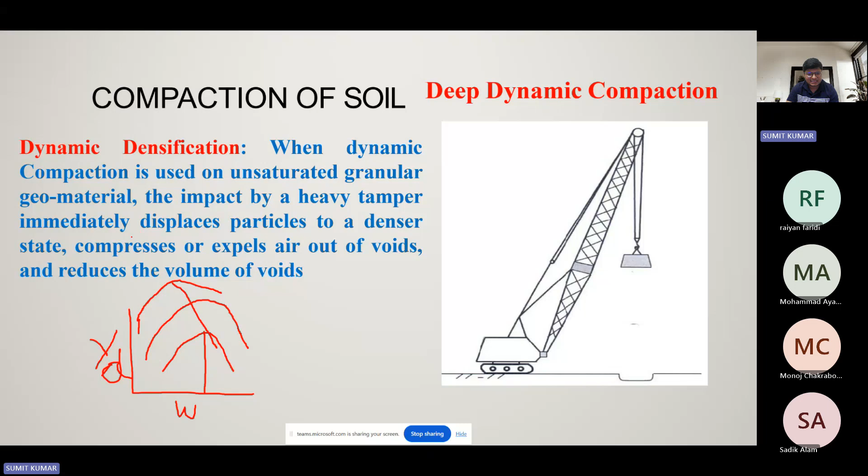So that takes large time to small time depending upon the type of soil. Suppose if we have sandy soil, the compaction takes place during the construction process only, but if clay soil is there, the overall compaction may take 100 years, 200 years. So that needs to be understood. Hence we want to densify the soil as much as possible before any construction of the superstructure. That is also valid for building construction as well, right? Okay, so I will go quickly with this and then move to the problem.

So some points here: deep dynamic compaction is generally not recommended for clay soil with high plasticity index and high degree of saturation. Drainage and dewatering are required to reduce the excess water pressure in the clay soil generated by deep dynamic compaction. A high water table reduces the effectiveness of dynamic compaction. If the water table is high and dynamic compaction is performed, the effectiveness gets reduced.

Regarding the application of dynamic compaction - it is used to improve problematic geomaterial by increasing the bearing capacity, reducing settlement, minimizing the collapsible potential, and mitigating the liquefaction potential for commercial and residential buildings, storage tanks, highways, railways, airports, and harbors.

Now talking about the advantages - what are the benefits which we achieve through compaction of soil? It improves a large area of geomaterial in a relatively shorter time at low cost, and is effective for loose and partially saturated fill with less than 15% fines. It can detect weak or loose areas during the operation and can change heterogeneous material to more uniform material.

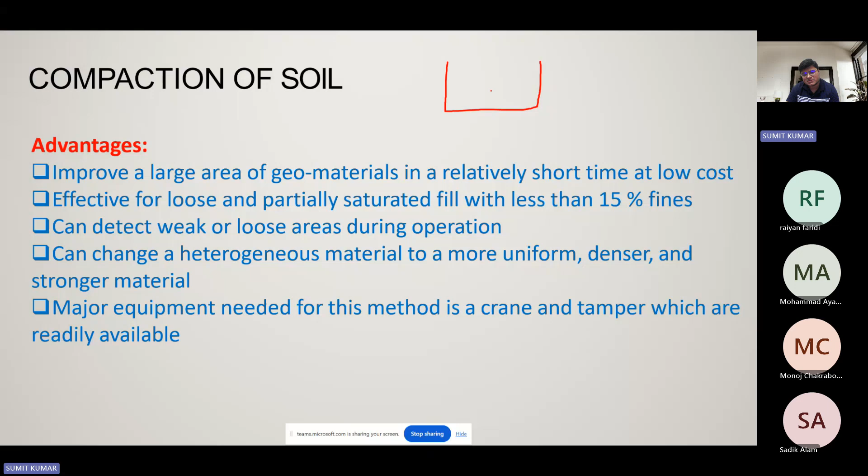So the major equipment needed for this method is a crane and a tamper, which are readily available, as also shown in the previous slide figure.

Now moving to the disadvantages of compaction of soil. Generally it is less to not effective to improve saturated clay soil. It has already been said that if the water table is there, it is a problem. So in saturated conditions, the water table is present up to the ground level if it is fully saturated.

Let me explain one thing - I think that thing is not discussed yet, so let me explain before moving ahead. Okay, let me read this disadvantages, then I want to discuss some important points which are very much important for this class. Let me read the disadvantages, then I'll discuss some points.

So, drainage and dewatering and a long waiting period is required to use saturated clay soils, and it induces noise, vibration, and lateral movement, which may cause problems to nearby buildings, substructures, and utility lines, maybe like pipelines that move from over there. The mobilization cost may be higher when large cranes and tampers are used, and instrumentation is required to monitor the various aspects.

Okay, so I want to discuss something. What is this? Let me add a blank slide.

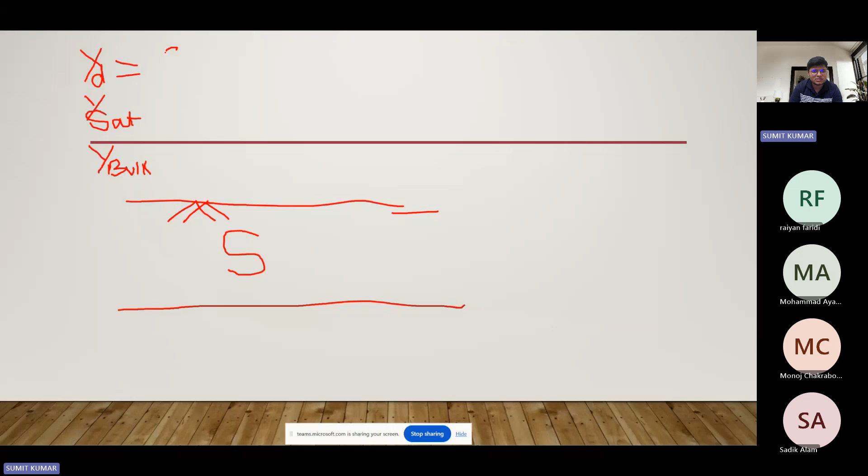Gamma dry is G into gamma W, divided by 1 plus E, where G is the specific gravity of soil, gamma W is the density of water, and E is the void ratio. Void ratio is the volume of void by volume of solid.

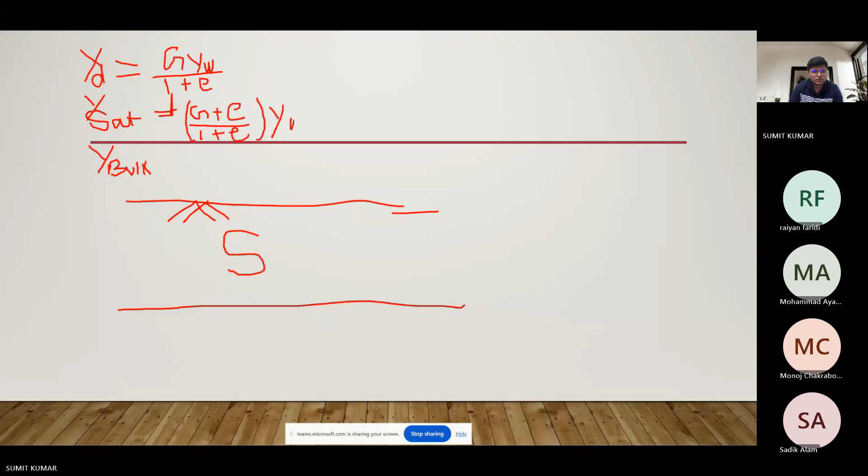Similarly, gamma saturated, that is equal to, I think that is understandable, G plus E upon 1 plus E, into gamma W. Where gamma bulk is G plus SE by 1 plus E, into gamma W.

Over here, G is the specific gravity, E is the void ratio, S is the degree of saturation, and gamma W is the density of water, wet density of water basically.

So over here, what I am saying is that this is the soil, and we may consider that water table is present at this level, and we could assume that above the water table, the soil is dry. Maybe bulk density could also be there if due to some

seepage, negative pore water pressure develops, or maybe some other condition. If the soil gets saturated over here, the gamma saturated could be there, but if it is not mentioned anywhere in the problem, it is gamma dry.

And over here the gamma saturated is there. Now some more important points which you need to understand before moving ahead: if gamma saturated is known and gamma dry is known, now understand what is the total stress, what is the pore water pressure, and what is the effective stress.

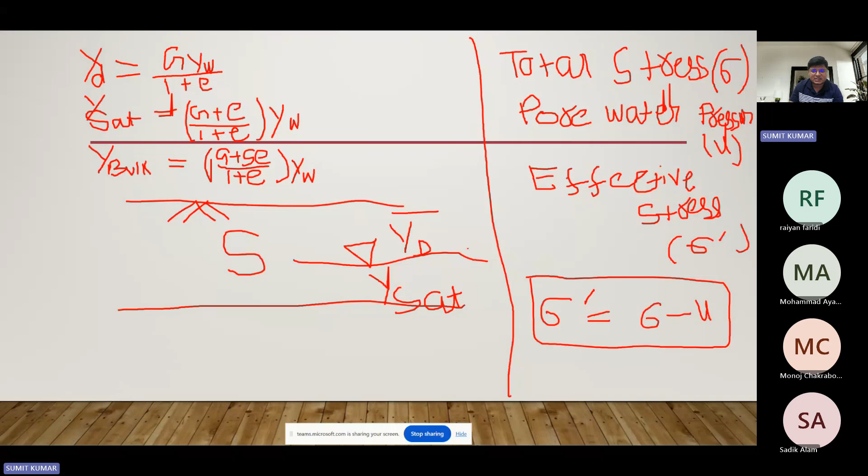Now let me take another slide to explain some more points about total stress, pore water pressure, and effective stress. So what is this? Let me take a new slide. Okay, now see, suppose I give a simple example, again with the same figure.

Suppose this is a soil, and suppose at this point this is a distance of 2 meters, and this is also 2 meters, and we want to get the total stress and effective stress at this point A.

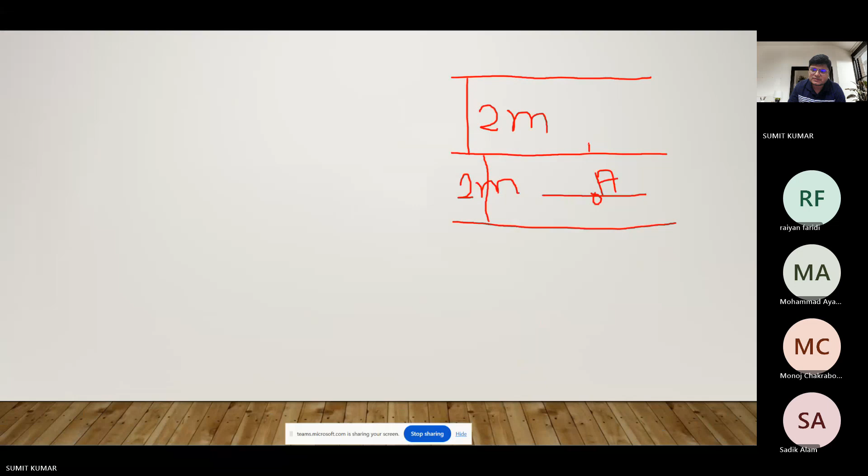At this point we want to get the total stress, effective stress, and pore water pressure, and suppose the water table is somewhat over here, and this is a ground surface. Ground surface is represented like this.

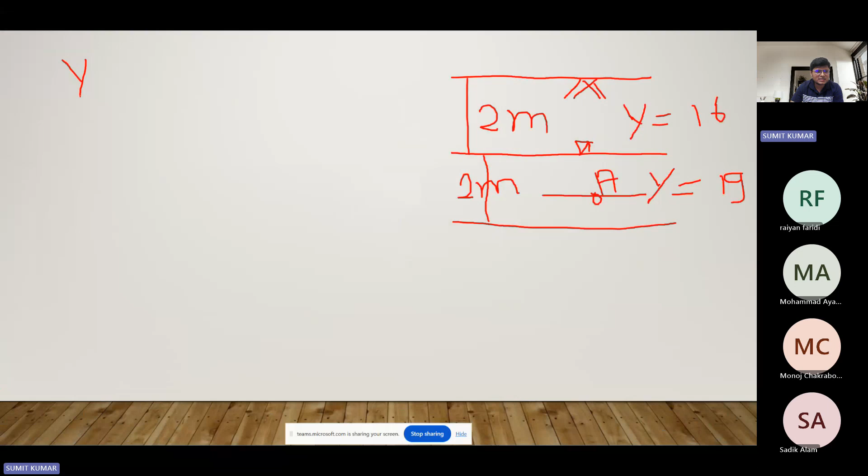Water table is represented by an inverted triangle, so water table is there, and the unit weight gamma for this, suppose 16 kilonewton per meter cube, and gamma for this may be 19 kilonewton per meter cube. In this case, assume gamma W, which is actually 9.81, as 10, just for understanding.

Now, so if we have to calculate the total stress, pore water pressure, and effective stress at A, we write total stress as sigma, as I already showed. So total stress becomes 16 kilonewton per meter cube multiplied by 2, plus 19 into 1. Basically, this point A is at the center of the second layer, 1 meter.

So this becomes 16 into 2, which is 32, plus 19, which gives 51.

51 kilonewton per meter square. This is the value of total stress, because total stress, pore water pressure, and effective stress came many times in this class. So I take a very small, simple example to explain it. Then we move ahead and see some more thing.

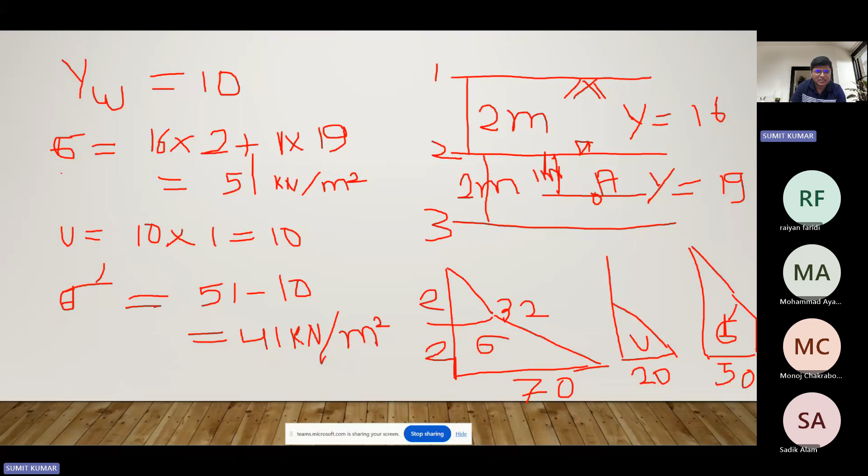give me a minute. Okay, okay, let me move ahead. Okay.

Okay, so now we will talk about design considerations. Before the design of the deep compaction, a geotechnical investigation is required to evaluate the site condition, which includes the geotechnical profiles. Different properties at the site also need to be understood, like the particle size, how much fine content is there, what is the degree of saturation, what are the Atterberg limits, because that becomes very much important before we go ahead.

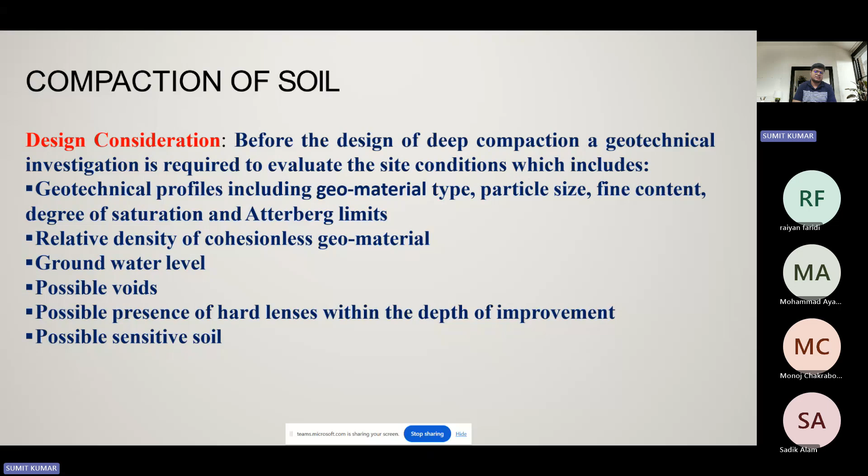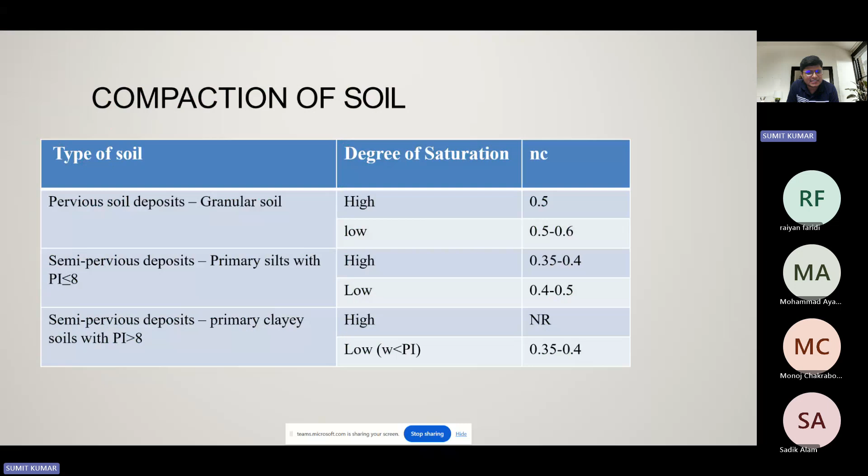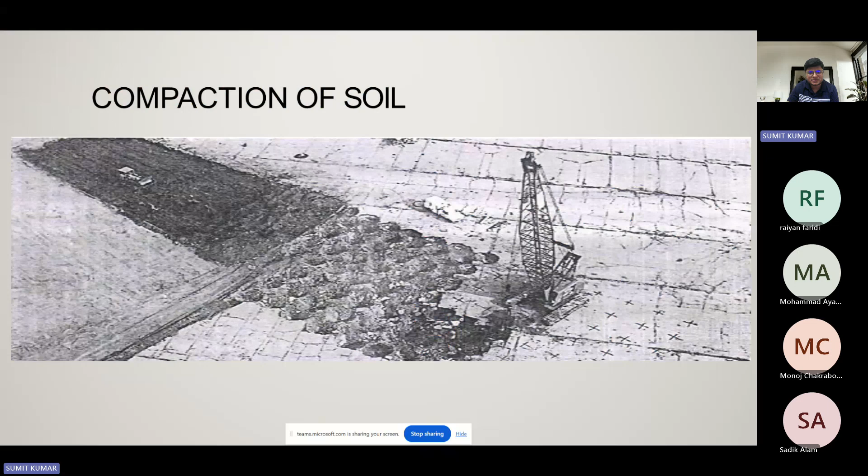Now we directly move to the numerical problems for saving time. Now we come across the problems which I want to discuss in this class only, because these problems have very much importance in developing the understanding of the subject. The theoretical concept you must go across in the lecture of the sir - over there they have discussed in very detail, but the numerical problems may be missed out, so it is better to cover the numerical problems.

So over here you see the question related to critical hydraulic gradient. I think the critical hydraulic gradient is something which we also calculated in the previous class. Over there, if you remember, we have calculated IC as critical hydraulic gradient as G minus...

Okay, we have calculated IC as G minus 1 upon 1 plus E as the critical hydraulic gradient, and IC by I equals factor of safety. So those things we have discussed.

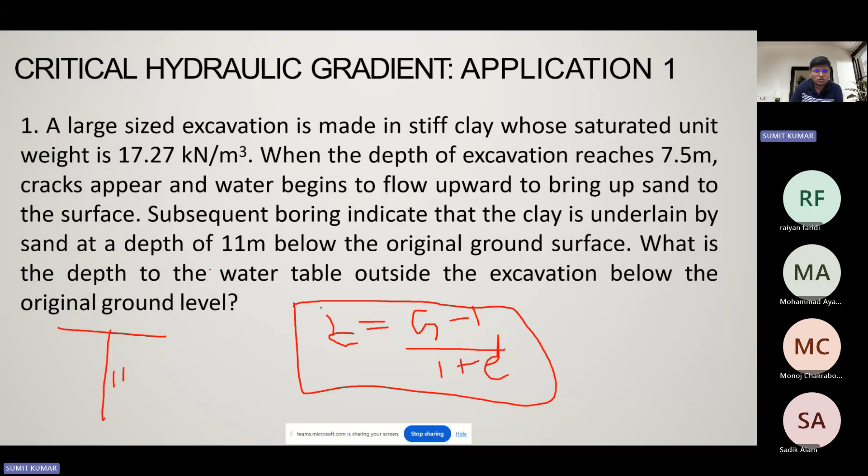So what is the depth of the water table outside the excavation below the original ground level? I have already solved this problem, so let's move to the solution.

First, since sand boils, the effective vertical stress at the clay-sand interface becomes 0, and the clay thickness below the excavation is 11 minus 7.5, because at 7.5 meters excavation the crack developed. So the upward head difference here is 7.5 minus dw, where dw is the outside water table depth below the ground.

The condition for boiling is that effective stress should be 0, and effective stress sigma v dash equals gamma sat times h minus pore water pressure, that is gamma w times delta h. So we calculated delta h as gamma sat upon gamma w into h, and with gamma sat given as 17.27 and gamma w as 9.81, delta h is found to be 6.16 meters.

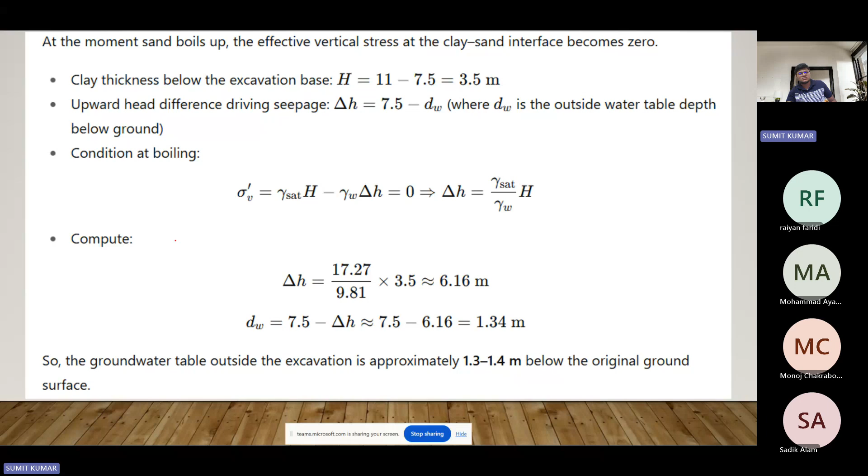Hence we are interested in calculating dw, the outside water table depth. So dw is 7.5 minus delta h, which is found to be about 1.3 meters. So the water table outside the excavation is approximately 1.3 to 1.4 meters below the original ground surface. I think this is a very simple thing.

Now let's move to the next problem, which I will solve. Over here also I have made the solution, but I will solve it with pen and paper for better understanding if required. Let me read the problem, since the previous one was a repetition of what we discussed in the last class, if you recall.

The question says: if an excavation is carried out in a soil with porosity 0.4 and specific gravity 2.65, determine the critical gradient. So first solve this part of the problem: excavation is carried out with porosity n equal to 0.4 and G equal to 2.65.

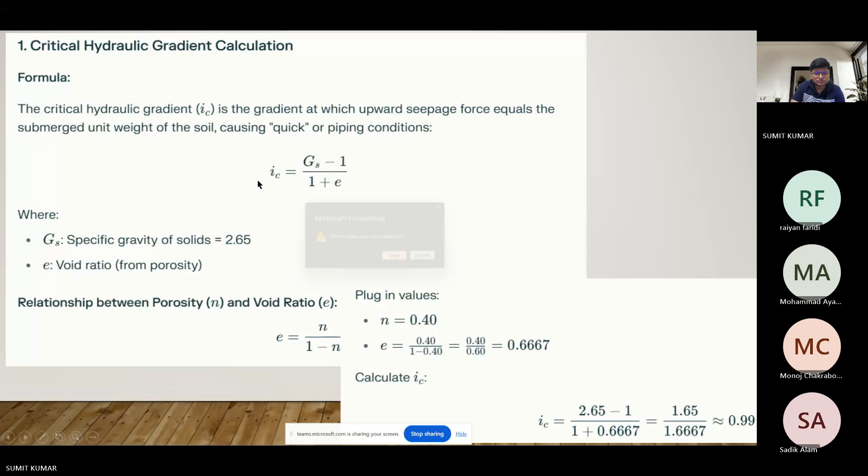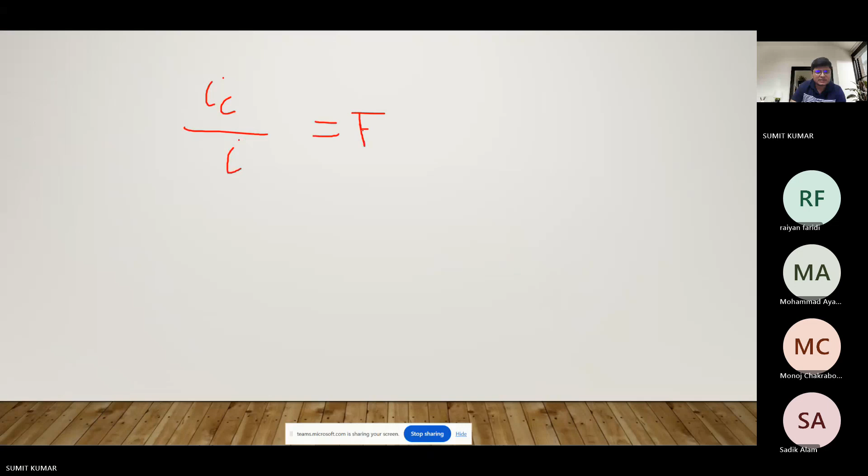We have IC upon I equal to factor of safety. This factor of safety is 2.5. So I is equal to 0.99 upon 2.5... the 1.5 meter layer of soil is subjected to upward seepage head of 1.95 meter. What is the depth of coarse sand? So this I equal delta H by L, upward seepage head of 1.95.

So this is equal to delta H upon L, and this delta H is 1.95 by L. L is nothing but 1.5 plus the required height, H. So by solving this, you could calculate H, which is the required height. Let me calculate... this comes out as 2.59995 upon... okay, maybe I made some calculation mistake. Let me see, this value becomes 3.42 meter.

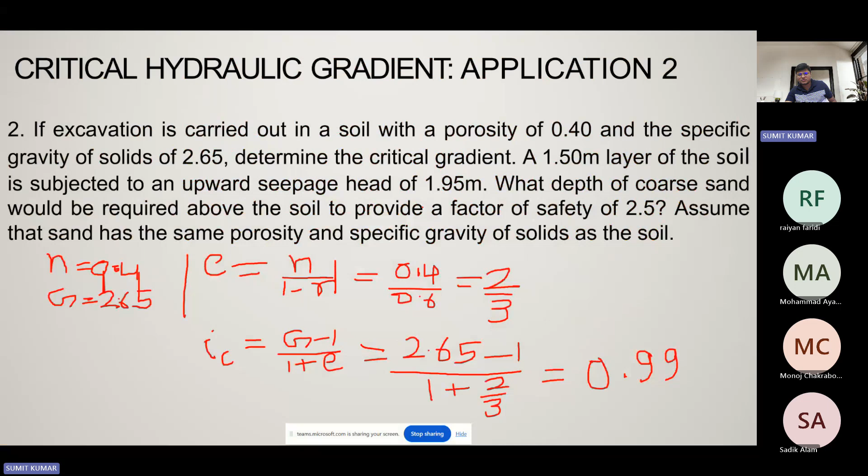I equal to seepage head 1.95 by 1.5. Okay, I considered something different. 1.95 upon 1.5, the actual hydraulic gradient is 1.95 upon 1.5. So I is 1.3, but the required factor of safety is 2.5. I did this as 0.3999 upon this, and this is what I did, but I can't find the mistake. Delta H 1.95 by 2.5 into 0.65.

I made some calculation mistake, but following the same concept, the solution comes out to be 3.42 meters. I used factor of safety equal to IC by I required, so I required is found to be 0.99 upon 2.5. IC by I equal to I required equal to factor of safety, IC by factor of safety - I made the mistake there. IC by 2.5, so IC 0.29... I don't know how I wrote this. It's IC upon 2.5, which is 0.99 upon 2.5.

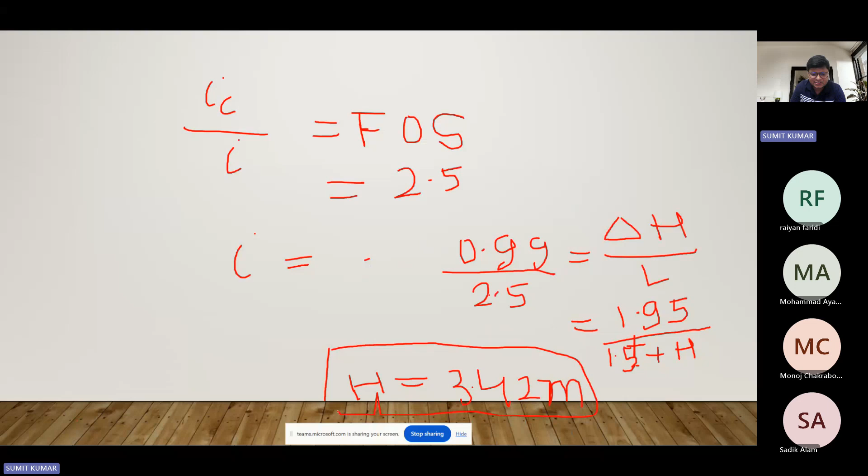Now let me calculate this again, because it gave me confusion. 2.5, 1.95 upon answer, minus 1.5, so it comes out to be 3.42 meters. So this is the answer - this much height of soil is required in order to achieve the factor of safety of 2.5. This is the solution, and the same thing they did, and they also found 3.42 meters, which we have found. So I think things are clear up to here.

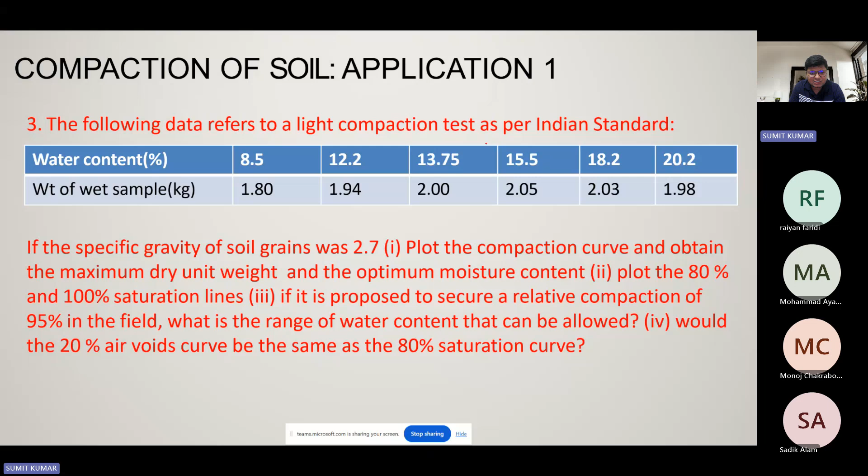Now this is also a problem based on the light compaction test, but this solution I have provided, I am not going to discuss it here. This will be shared with you, you cover it by yourself, because it's not that much conversion, so I don't want to waste time on this problem. We'll move to the next problem from here and solve it.

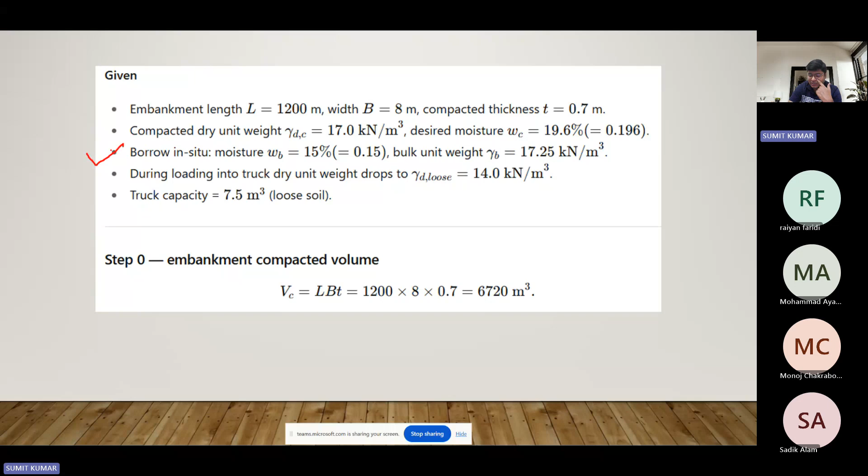We need to know the same mass of dry soil to be compacted in the embankment using the dry unit weight in kilonewton per meter cube and the dry weight required. Since VC is already calculated, gamma D into VC gives the in-situ borrow pit dry unit weight. First we calculate gamma D, which is 17.25 upon 1 plus W, where W is 15%, as seen from the third point. As seen from this point, we calculate the dry density as 15 kilonewton per meter cube.

We multiply it with this volume of 6720 to calculate the weight. Dividing by 15, we calculate the in-situ volume required, that is 7616 meter cube, which is asked in the first part of the problem: the volume of soil to be excavated from the borrow area.

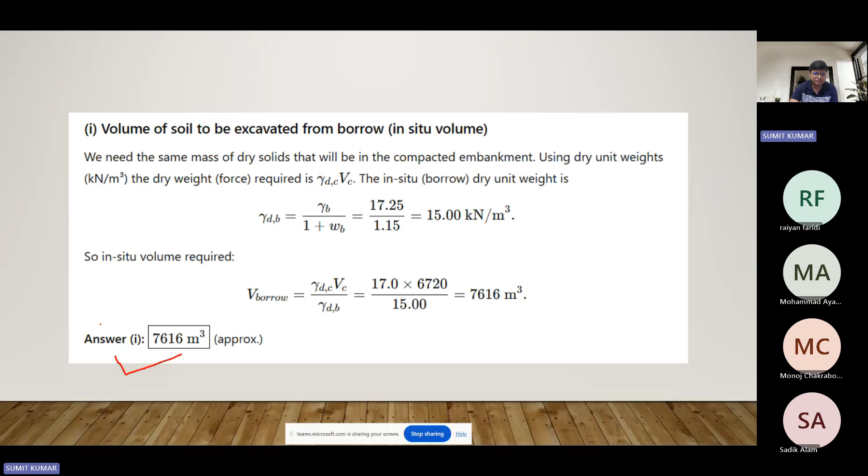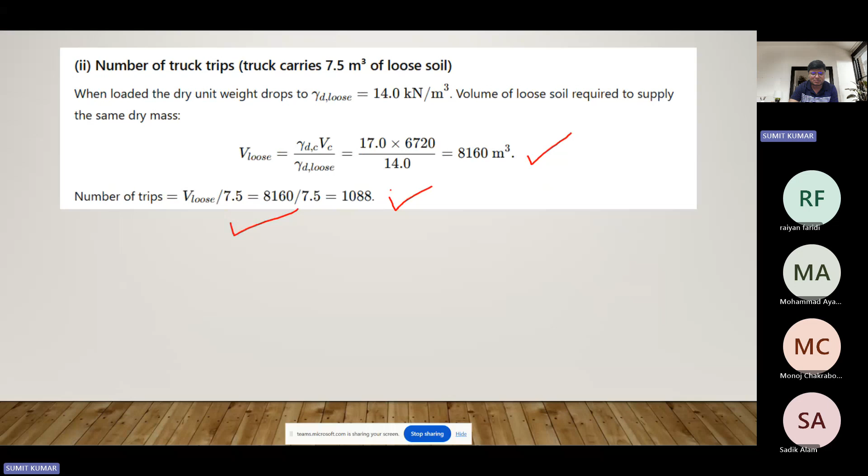This becomes 1088. Maybe there's some calculation mistake somewhere, so you can check it yourself, but more or less this is the correct answer. The next part of the problem asks about the volume of water to be added at the site.

The water mass present at 15% moisture content is a certain value, and the water content required is 0.196. So the extra water required is 2.2824 into 10 to the power 6 minus 1.7468 into 10 to the power 6, which becomes 5.36 into 10 to the power 5 kg. Converting to volume by dividing by 1000 kg per meter cube gives 535.7 meter cube. Hence 536 meter cube of water is required to achieve the moisture content of 19.6%, as requested in the problem.

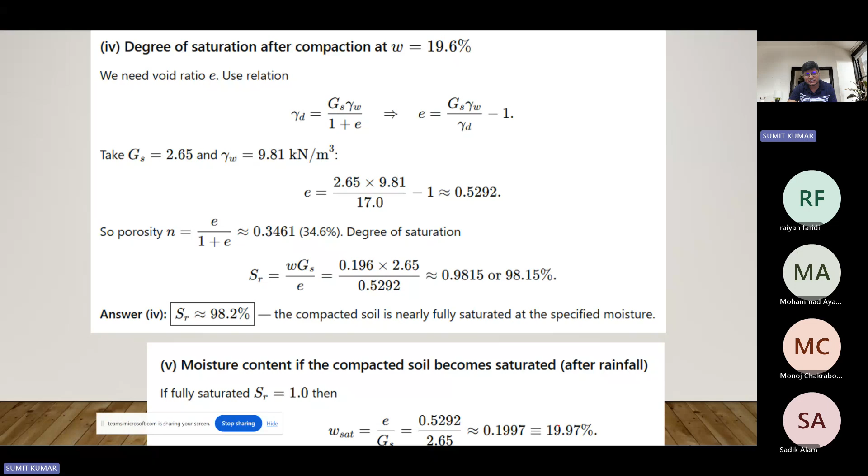Next, regarding moisture content: if the compacted soil becomes saturated after rainfall, the degree of saturation becomes 1. At that point, calculating the water content at saturated condition, it is found to be 19.97%. This problem is now solved, and I suggest you go through it yourself and verify whether the solution matches, because if there's some calculation mistake, there might be errors in the value, but the steps are more or less the same.

Now we move to the effective stress concept, which I already discussed in two of the slides earlier in this class. Here we are talking about effective stress in soil. The concept of effective stress was introduced in 1923 by Karl Terzaghi, also known as the father of soil mechanics. Earlier, stress was calculated only as total stress; there was no effective stress concept. So what is the need to calculate effective stress? Total stress is not sufficient to define or explain things, so there must be some need or requirement that led to the concept of effective stress.

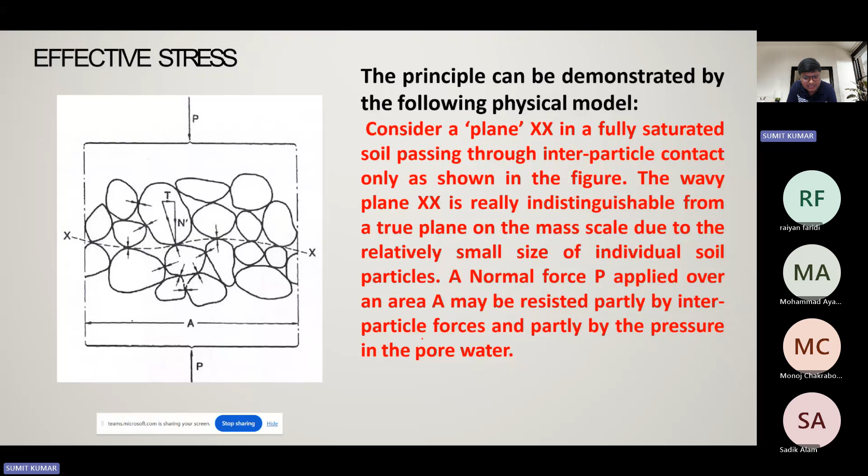A normal force P applied over an area A may be resisted partly by the interparticle force and partly by the pressure in the pore water. The interparticle forces are very random in both magnitude and direction throughout the soil mass.

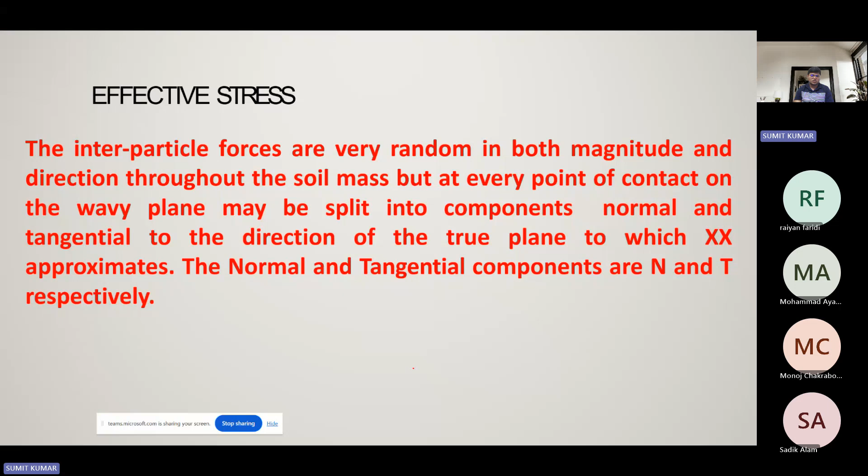But at every point of contact on the wavy plane, the force may be split into components normal and tangential to the direction of the true plane which the XX plane approximates, with the normal and tangential components being N and T respectively. The effective normal stress is interpreted as the sum of all normal components divided by area, a summation of N by area from that figure, and the total normal stress is given by sigma equal to P by A.

Subsequently, if point contact is assumed between the particles, the pore water pressure will act on the plane over the entire area A. Then for equilibrium in the direction normal to XX: P equals summation of N' plus u into A, or P by A equals summation of N' by A plus u, or sigma equals sigma' plus u, or sigma' equals sigma minus u, which means that the effective stress is equal to total stress minus pore water pressure.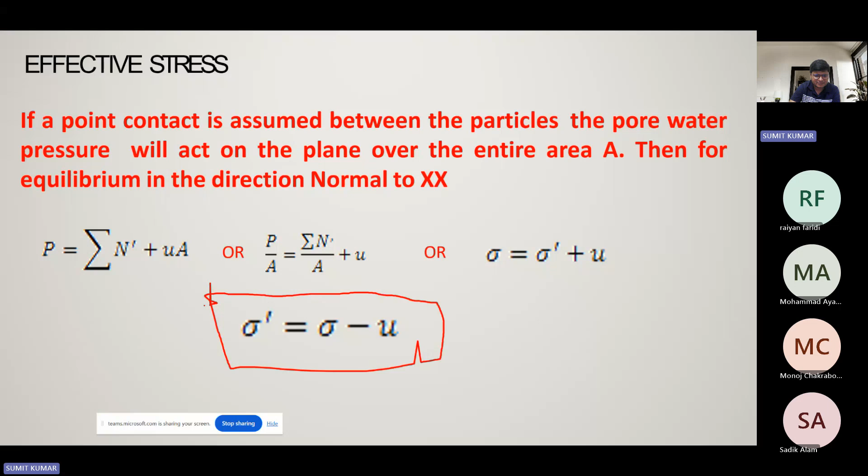Now let's talk about the critical points to note on the effective stress. Some of the most important points which need to be underscored, underlined, and highlighted while discussing total stress, pore water pressure, and effective stress concepts.

The pore water pressure, which acts equally in every direction, will act on the entire surface of any particle, but is assumed not to change the volume of particles. Also, the pore water pressure does not cause particles to press together.

The error involved in assuming point contact between the particles is negligible in the soil, since the total contact area is normally between 1 and 3% of the cross-sectional area A. The effective stress is a concept that is the summation of normal load through the contact points divided by the total area. Hence it does not represent the true contact stress between the two particles. The actual contact stress N/a is much higher than that of the defined effective stress.

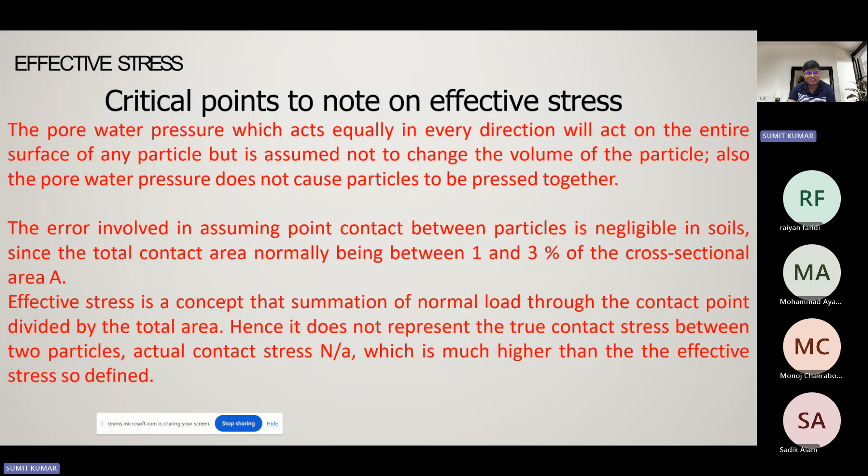Now, talking about the effective vertical stress due to self-weight, it becomes gamma sat into Z, considering a soil mass having a horizontal surface with the water table at the surface level. The total vertical stress, that is the total normal stress on the horizontal plane at depth Z, is equal to the weight of all material, that is solid plus water only, because the void filled with air has no weight.

Similarly, the pore water pressure becomes the weight density of water multiplied by the depth at which it is present, and the pore water pressure at any depth will be hydrostatic, since the void space between the solid particles is continuous, so the depth changes accordingly.

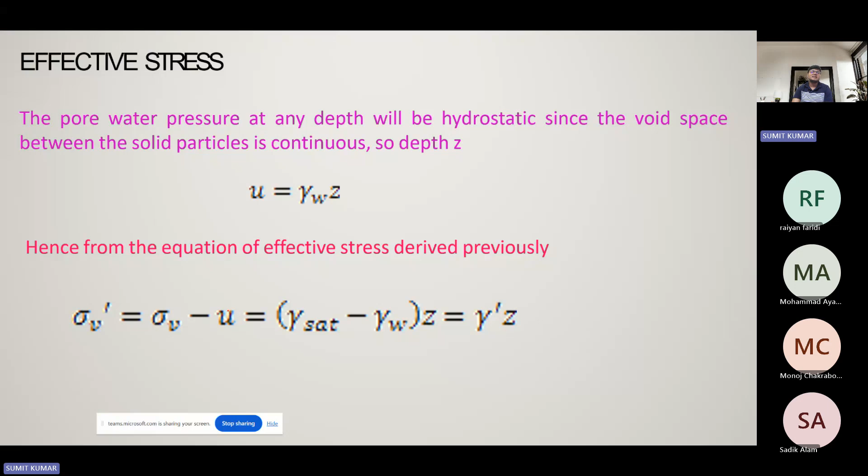Hence, from the equation of effective stress derived previously, sigma v' becomes sigma v minus u, which becomes gamma sat minus gamma w into z, that is gamma' into z, which is the effective stress if the water table is present up to the ground surface. If that is not the case, things may look different.

Now we have the next problem, which is a very good problem. Let me take another slide in which I am going to solve it.

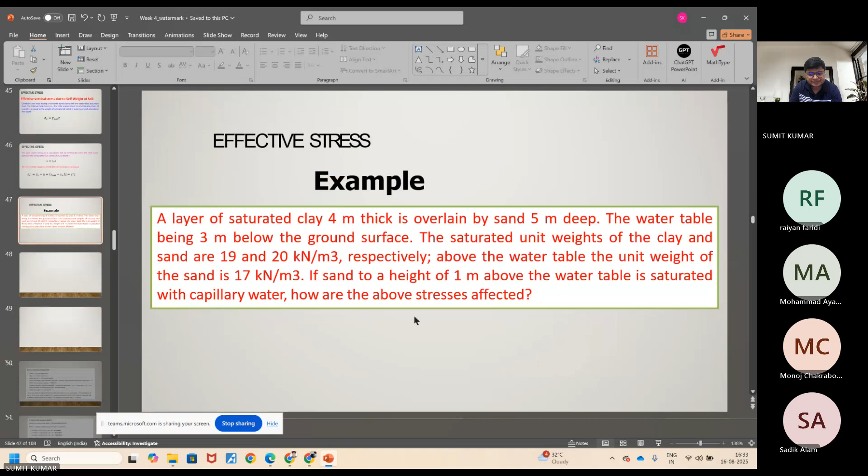Okay, so let's read the question first. A layer of saturated clay 4 meter thick is overlain by sand 5 meter deep. The water table is 3 meter below the ground surface. The saturated unit weight of clay and sand are 19 and 20 kilonewton per meter cube respectively. Above the water table, the unit weight of sand is 17 kilonewton per meter cube. If the sand to a height of 1 meter above the water table is saturated with capillary water, how are the above stresses affected?

So let me draw this soil profile first. A layer of saturated clay 4 meter thick is overlain by sand 5 meter deep. This is a clay layer, this is a sand layer. This is 4 meter and this is 5 meter. So this is 5 meter sand and 4 meter clay layer. The water table is at 3 meter below the ground surface, so the water table is somewhat here, 3 meter below the ground surface.

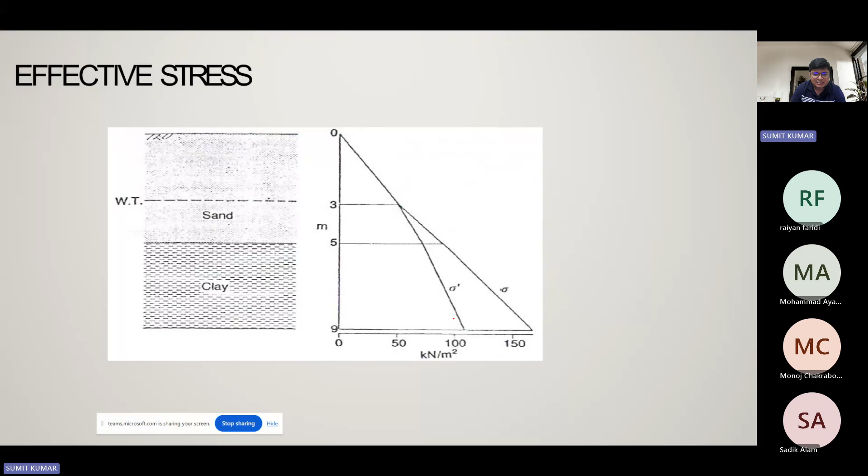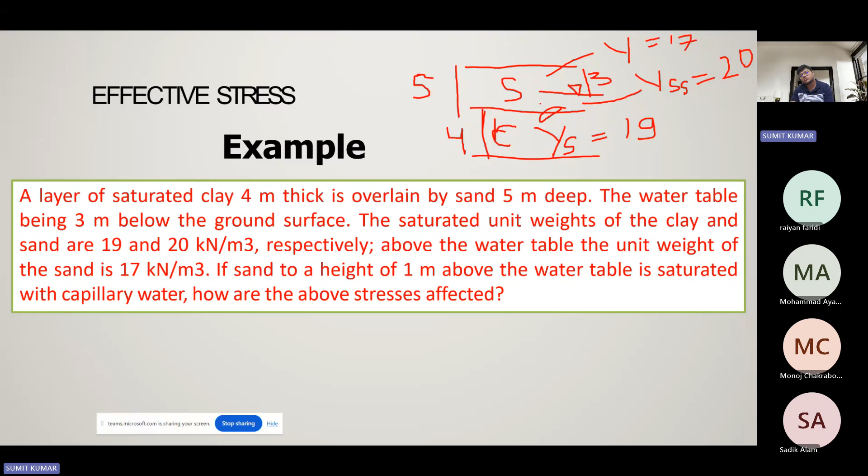So if capillary rise causes the soil to get saturated for 1 meter above this surface, then in a similar fashion to what we calculated, the equation remains the same, but something changes - for that 1 meter, gamma sat is there, but the pore water pressure is not reduced, because due to capillary rise, if soil gets saturated, that is not converted into pore water pressure. Hence, the effective stress value gets changed like this.

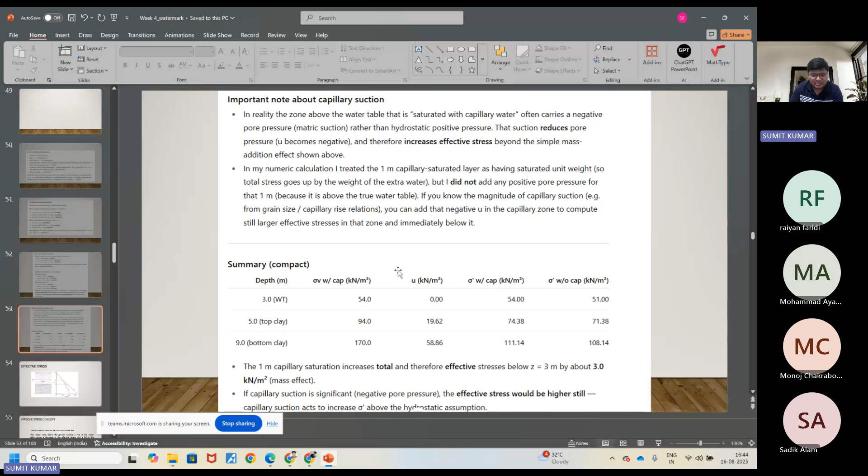Okay, and I think the solution is also provided in this form, but this is not highlighted there. So what changes is made is presented here, for what thickness what changes is made. So I will give you the solution, but I think this understanding is very much clear for everyone.

Before moving to the next problem, let's discuss the effective stress concept - specifically the variation in effective stress with the shift in the groundwater table. For the water table below the ground surface, a rise in water table causes a decrease in the effective stress, and a fall in the water table produces an increase in the effective stress.

A rise in the water table causes a decrease in effective stress. If water table rises, pore water pressure increases, and when pore water pressure increases, the effective stress gets reduced. But if the water table falls down, effective stress increases because pore water pressure gets reduced. So total stress minus pore water pressure is effective stress, hence it gets increased.

Similarly, for the water level above the ground surface, fluctuation in the exposed water level does not alter the effective stress. If this is the soil surface and water level is at this place, but if water table reaches to some other section, and ground surface is here only, the effective stress doesn't get altered by the change of water table above the ground surface, because effective stress is total stress minus pore water pressure.

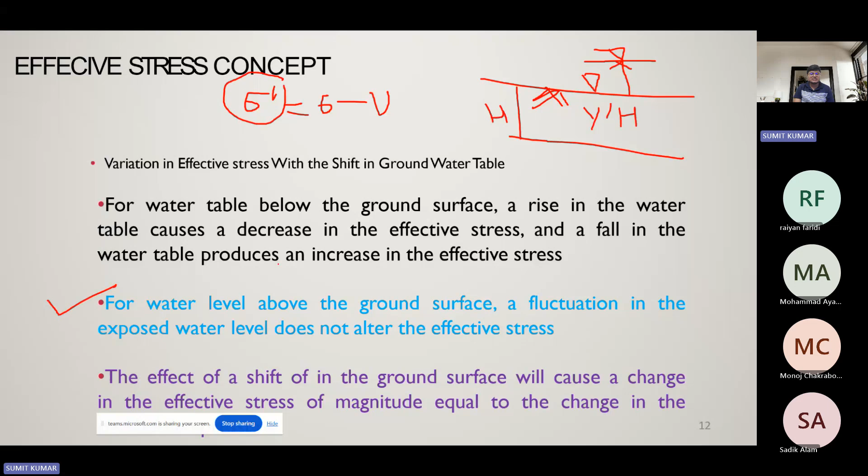It doesn't get altered, as mentioned: for the water level above the ground surface, fluctuation in the exposed water level does not alter the effective stress. And the effect of the shift in ground surface will cause a change in the effective stress, of magnitude equal to the change in the overburden pressure. Obviously.

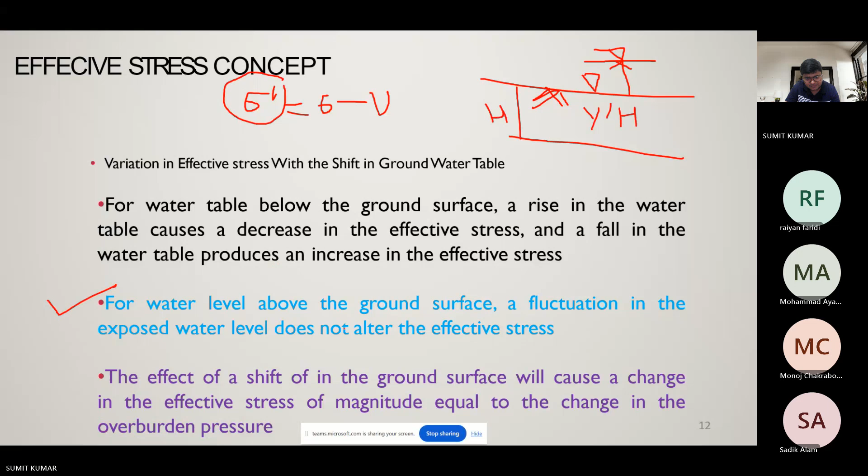We already made this discussion with the help of an example, but let me discuss it briefly. We made the total stress, water pressure, and effective stress diagram. Here you can see a soil sample of thickness Z1, and Z2 is the water above it, and we have to calculate the effective stress at point 1. So here the stress diagram is presented.

At any depth Z, soil has a hydrostatic pressure, that is pore water pressure at any depth Z. Let me take a highlighter - if you see this figure, you can observe that Z2 is the height of water. So the pore water pressure at this point, at depth Z below the soil surface, is Z plus Z2 into gamma W - that is the pore water pressure.

At any depth Z, total stress is Z2 plus Z into gamma W plus gamma saturated into Z gamma saturated. This is not gamma submerged because I am writing total stress. When we write the effective stress, it becomes sigma z minus uz.

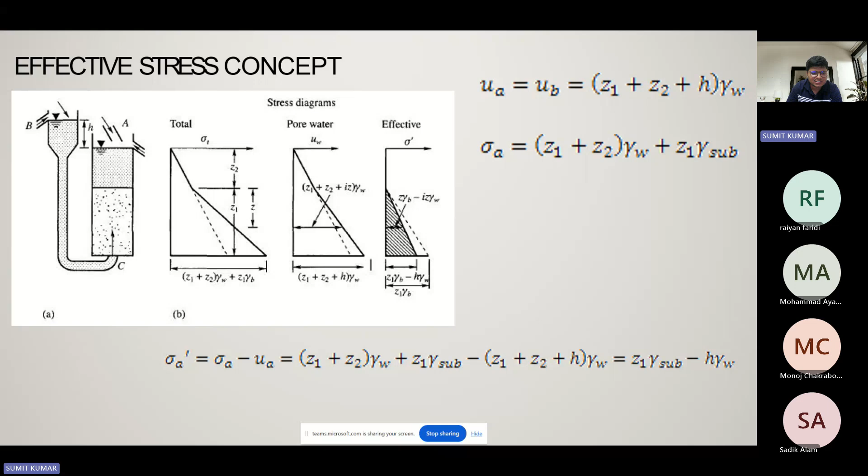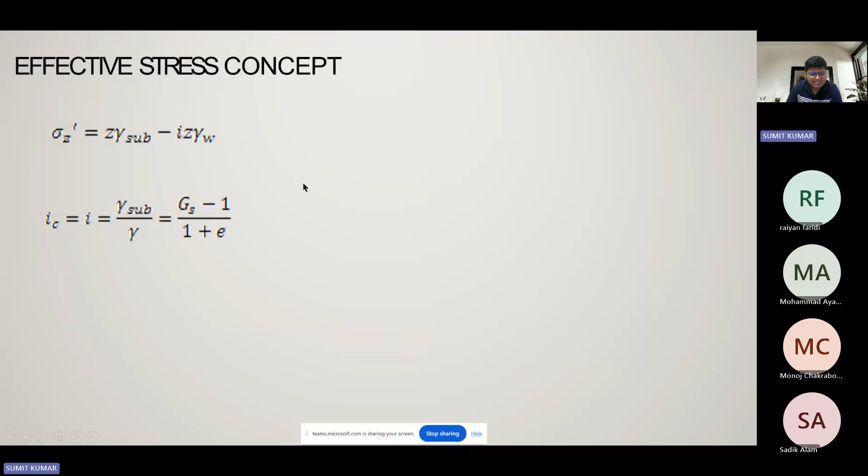IC equal to G minus 1 by 1 plus E - we already read this and also solved a problem based on it. This is the critical hydraulic gradient, in which Gs is the specific gravity, E is the void ratio. Now let's move to the next problem.

This problem says: for a soil profile given below, determine the total, effective stress at point A. What will be the total, neutral, and effective stress at point A if the groundwater level rises to the ground surface?

Will there be any change in the effective stress at point A if the water table raises 2 meters above the ground surface? The answer will be no, there will be no change. But let me explain this problem step by step.

First we calculate the density for this layer and this layer. Over here we consider gamma as gamma dry, and over here we consider gamma as gamma saturated. Gamma dry is G into gamma W by 1 plus E. When we calculate this, it comes to 2.7 into 9.81 by 1 plus 1, giving a value of 13.24 kilonewton per meter cube.

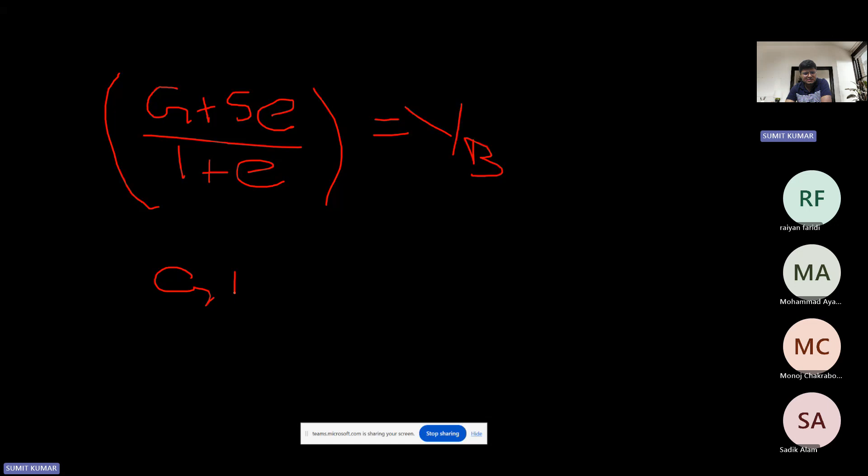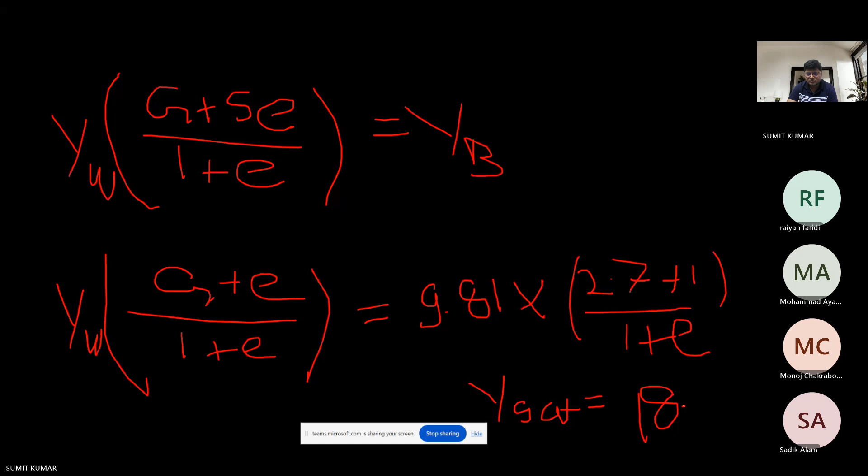Now calculate gamma sat, which is G plus SE by 1 plus E. SE equals WG, so S equals 1 for saturated soil. Gamma sat is G plus E upon 1 plus E, into gamma W. This value comes to 9.81 multiplied by 2.7 plus 1, divided by 1 plus E, giving gamma sat equal to 18.15 kilonewton per meter cube.

Now it says calculate the total, neutral, and effective stress at point A. Total stress sigma at point A is gamma dry into 2, that is 13.24 multiplied by 2.

Now we calculate the pore water pressure at A. Pore water pressure at A is 9.81 into 2 plus 9.81 into 4, that is 9.81 into 6, because the water table is here, and from here to here the pore water pressure gets developed. If we apply a piezometer at point A, the water rises up to this level, so 9.81 into 6 is the pore water pressure. U is 9.81 into 6, which comes to 58.86.

Effective stress sigma dash equals sigma minus u, that is 141 minus 58.86, which comes to 82.4. Hence, the effective stress at point A is 82.4 kilonewton per meter square.

Now the next part of the problem asks: what will be the total, neutral, and effective stress at point A if the groundwater table raises to the ground surface? If the water table reaches here, the total stress and effective stress both get changed at point A. Let me calculate the total stress, effective stress, and pore water pressure respectively for this case too.

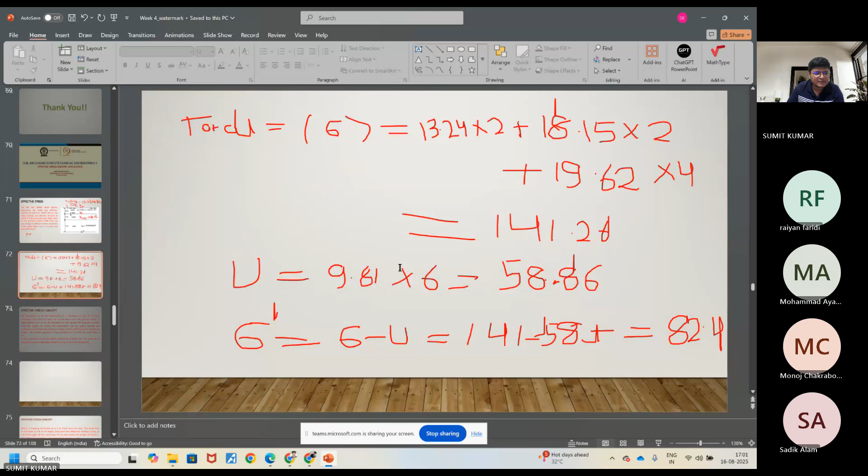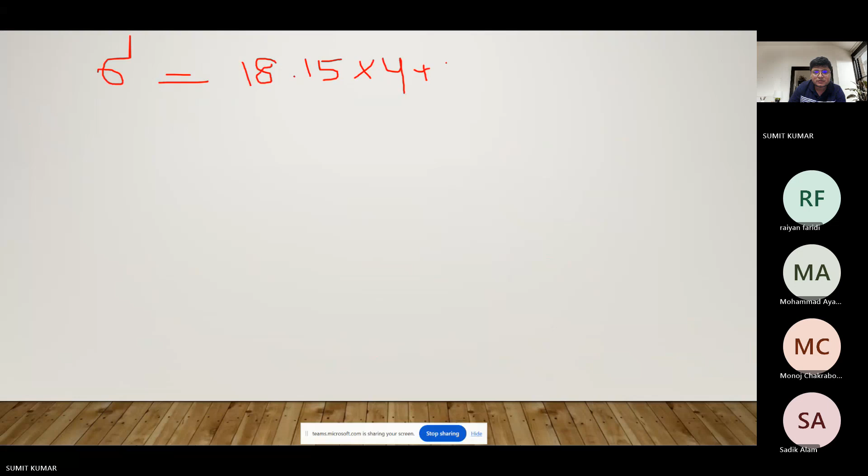Let me complete this quickly since time is running out. For this case, total stress gets changed to sigma equal to 18.15 into 4 plus 19.62 into 4. This comes to 151.08.

Pore water pressure in this case is 9.81 multiplied by 8, which comes to 78.48. And sigma dash equals sigma minus u, that equals 151.08 minus 78.48, which comes to 72.6.

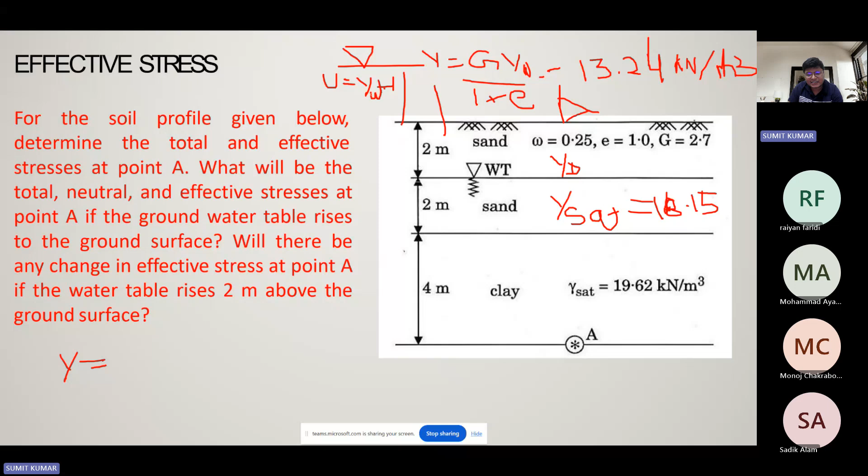Now the last part of this problem asks: will there be any change in the effective stress at point A if the water table raises above the ground surface? If the water table rises to height h, the pore water pressure developed is gamma w into h. When we calculate the effective stress, the total stress increases by gamma w h, but the pore water pressure also increases by gamma w h, and that gets subtracted. So the effective stress doesn't change if the water table raises above the surface, irrespective of the height. Effective stress at point A doesn't get affected.

So that's the full explanation. Now some more problems are also there, let me go quickly and solve all of them.

This problem says that water is flowing vertically up a 2-meter thick layer of sand. The head loss in the flow is 0.8 meter. Calculate the effective vertical stress at mid height of the sand layer if the saturated unit weight of sand is 19.5 kilonewton per meter cube.

One important relation for effective stress is, if water flows in the upward direction, sigma dash (effective stress) equals gamma dash (submerged unit weight) times Z minus i (the hydraulic gradient) into Z, where Z is the depth at which we need to calculate the effective stress, into gamma W.

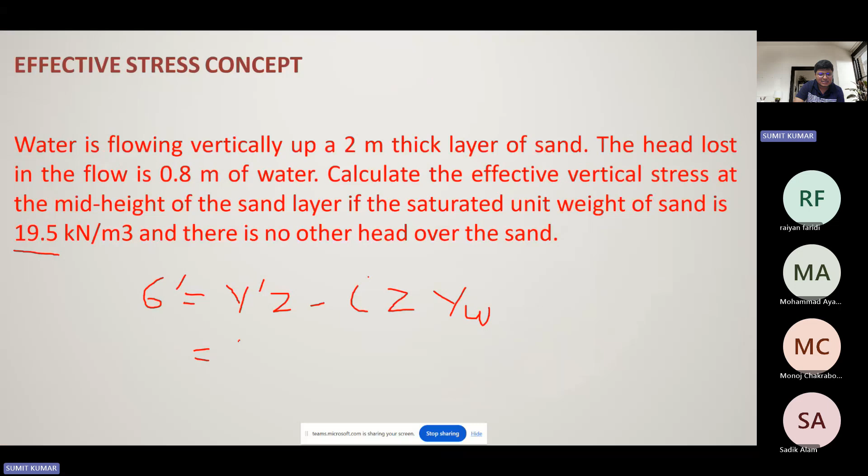So in this question, gamma saturated is given as 19.5. So gamma dash becomes 19.5 minus 9.81.

We calculate the effective vertical stress at the mid height of the sand layer, and since the sand layer is 2 meters thick, this needs to be calculated at Z of 1, minus iZ gamma w. Here i is 0.8, since the head loss in the flow is 0.8 meters, and this head loss takes place over the overall 2-meter flow. So i is 0.8 by 2, multiplied by Z which is 1, and gamma w is 9.81.

When you calculate this value, sigma dash comes out to be 5.76.

But in the same case, if the water flows in the downward direction, this minus sign changes into a plus sign, because the relation is sigma dash equal to gamma dash Z plus or minus iZ gamma w. If flow takes place in the downward direction, it is gamma dash Z plus iZ gamma w. If flow takes place in the upward direction, the condition changes to gamma dash Z minus iZ gamma w.

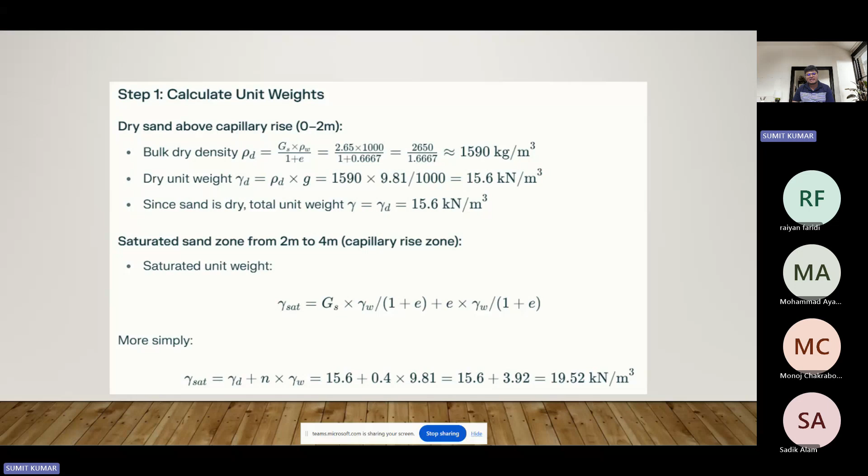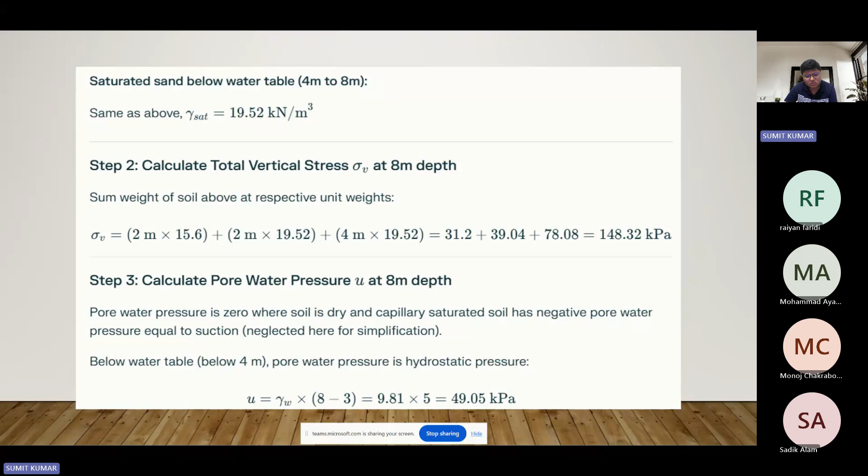Subsequently we calculate the total vertical stress at depth 8 meter as 148.32 kilonewton. Then we calculate the pore water pressure at the same depth, and subtract it from the total stress: 148.32 minus 49.05 equals 99.27 kPa. The total stress, pore water pressure and effective stress at those places are mentioned here.

I think these things are very much clear for this problem. There will be no doubt if you go across it by yourself. So up to this, things are covered.

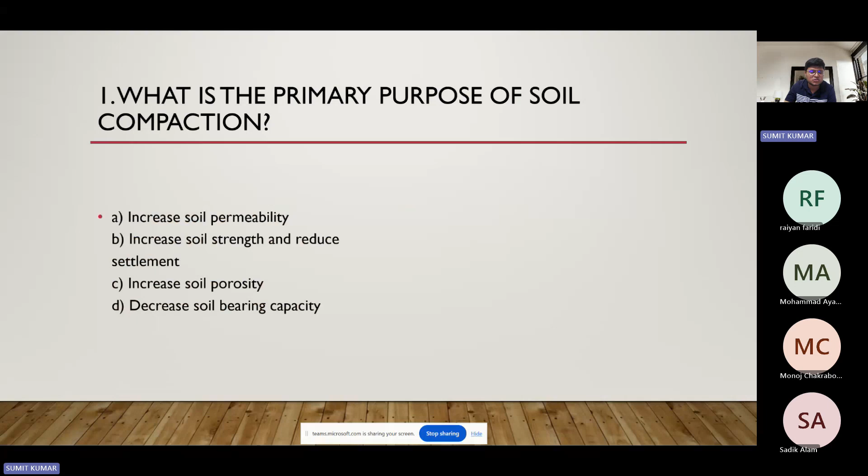So, what is the primary purpose of soil compaction? The options are: increase soil permeability, increase soil strength, reduce settlement, increase soil porosity, decrease soil bearing capacity. From the options, increase soil strength and reduce settlement is the correct answer, so option B.

Next question: which of the following methods is commonly used for the compaction of cohesive soils? For cohesive soil, as discussed with the sheepsfoot roller table in the previous class, the correct answer is option A, the sheepsfoot roller.

Next question states: the optimum moisture content corresponds to maximum dry density, minimum dry density, maximum soil porosity, or maximum permeability. If you have gone through the previous class, you know it is maximum dry density.

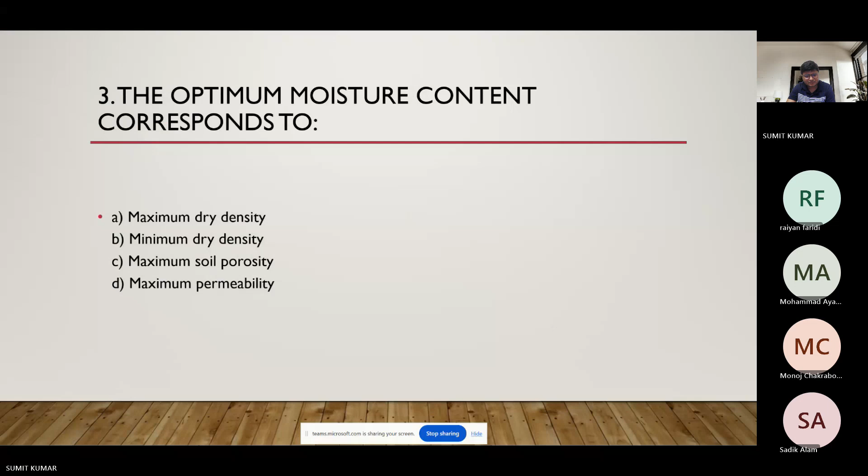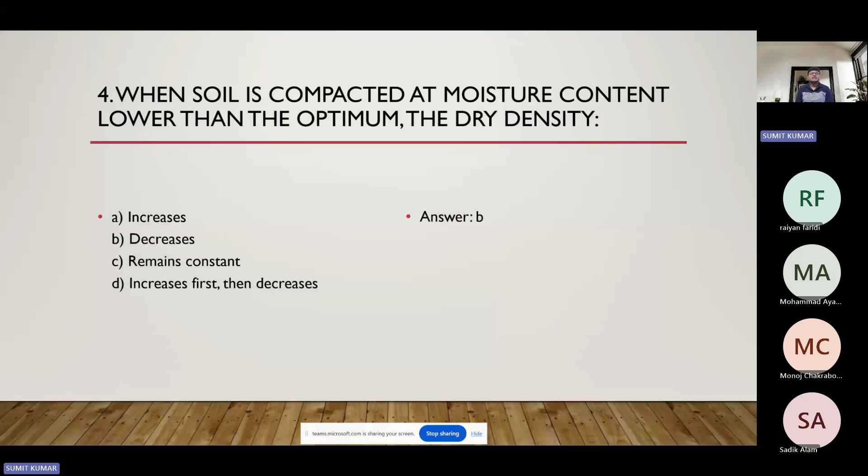Option A is correct for the previous question. Next question: when the soil is compacted at a moisture content lower than the optimum moisture content, does the dry density increase, decrease, remain constant, or increase then decrease? Option B is correct - the dry density decreases.

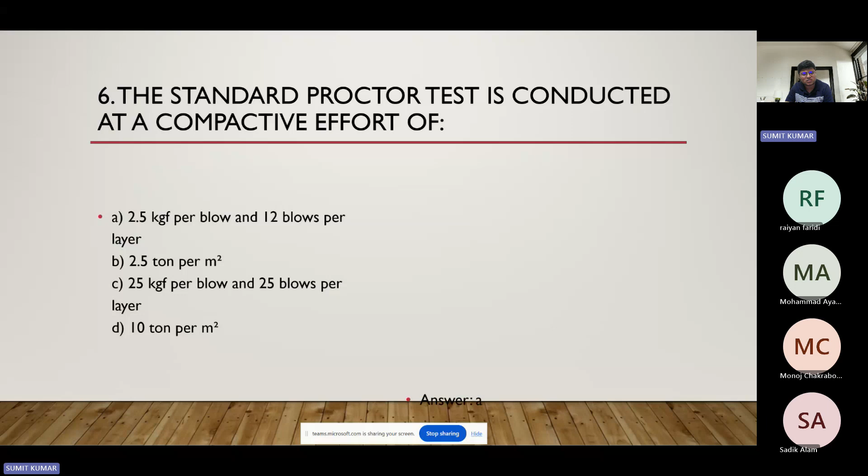Next question says a standard Proctor test is conducted at a compactive effort of... this wasn't discussed today, so that's not a problem. Answer A is correct: 2.5 kg hammer and 12 blows per layer.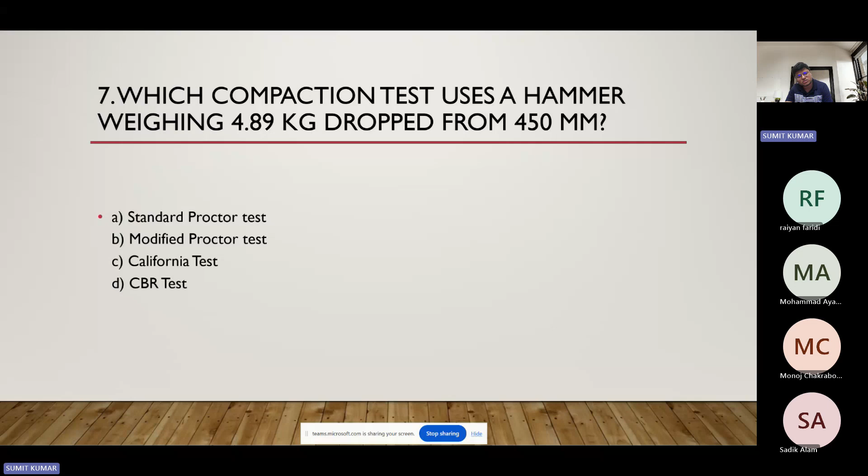Next question: which compaction test uses a hammer of weight 4.89 kg dropped from 450 mm? Again, this wasn't discussed today, but option B is the correct answer for this problem.

Next question asks whether in the modified Proctor test, the compaction effort is less than, same as, greater than, or unrelated to the standard Proctor test. It is greater than the standard Proctor test, so option C is the correct answer.

Next question: the dry density in soil compaction is defined as the weight of moisture per unit volume, weight of soil per unit volume of soil, weight of solid per unit volume of solid, or weight of wet soil per unit volume. Option B, weight of solid per unit volume, is the correct answer.

Next question states which soil type generally requires more compactive effort. The answer is option B, fine grain soil.

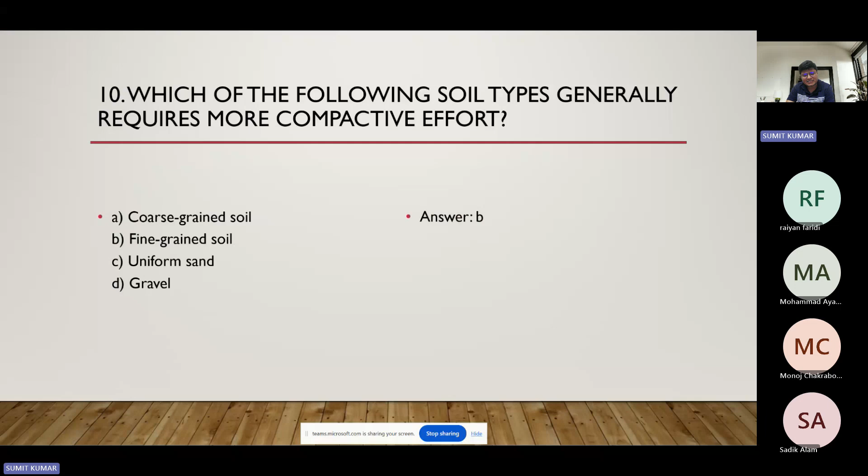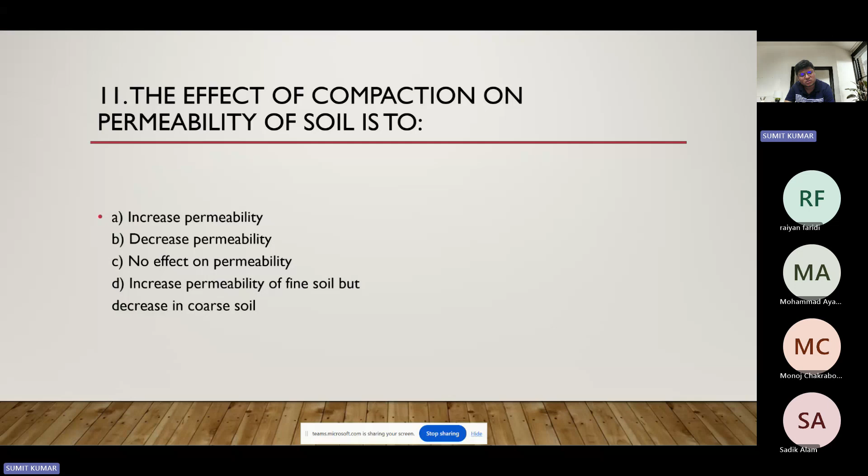Next: the effect of compaction on permeability of soil - does it increase permeability, decrease permeability, or have no effect? Decrease permeability is the correct answer, option B.

Next: the curve drawn between dry density and moisture content is called the compaction curve, consolidation curve, permeability curve, or stress-strain curve. The correct answer is option A, compaction curve.

Next: increasing the compactive effort in the field generally results in higher dry density and lower moisture content - lower moisture content needed for the maximum dry density. Option C is correct.

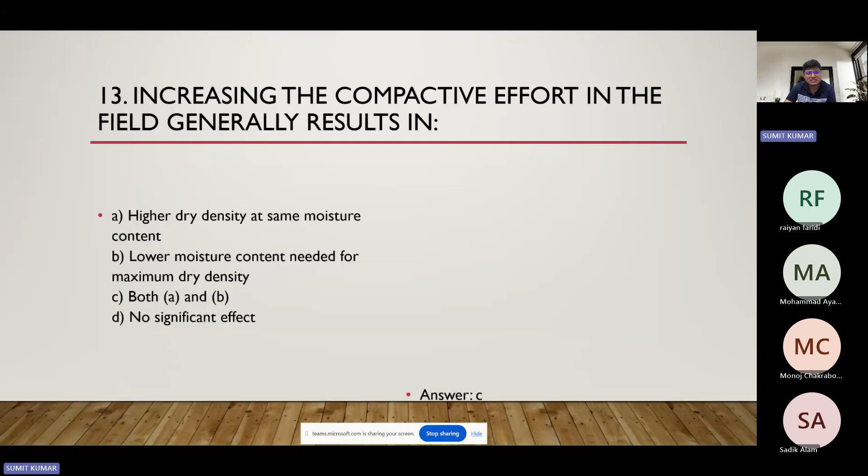Next: the phenomenon that at optimum moisture soil attains maximum dry density is due to reduction in air void, excess water lubrication, oversaturation, or soil particle size increase. Option A is the correct answer - reduction in air void, that's why maximum dry density is achieved.

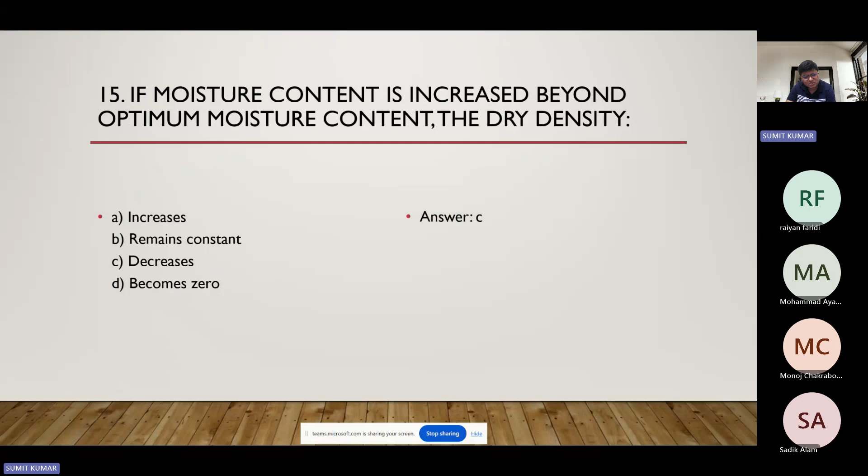Next: if the moisture content is increased beyond the optimum moisture content, does the dry density increase, remain constant, decrease, or become zero? It decreases. Next: relative compaction is defined as the ratio of dry density to the maximum dry density, so option B is the correct answer.

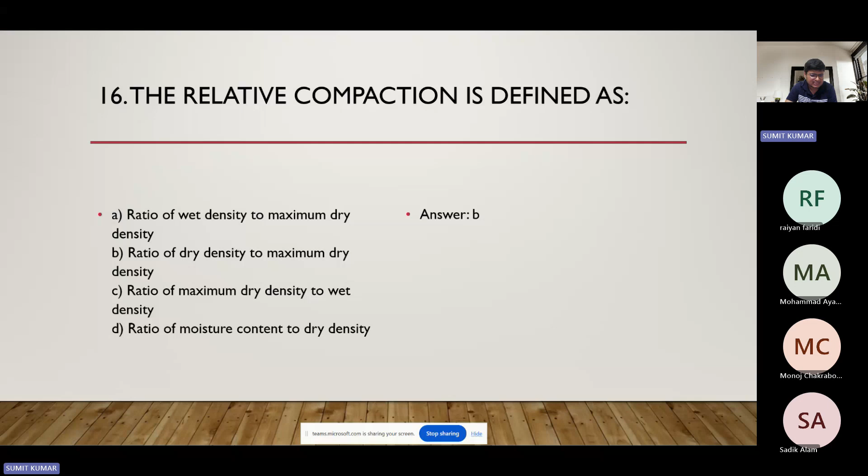Next: pneumatic rollers are mainly used for fine clay soil, unstable soils under wet condition, gravel and granular soil for better compaction, or compaction of silty soil. Option C is the correct answer.

Next: which equipment is most suitable for the compaction of cohesionless soil? Option C, the vibratory roller, is the correct answer for this problem.

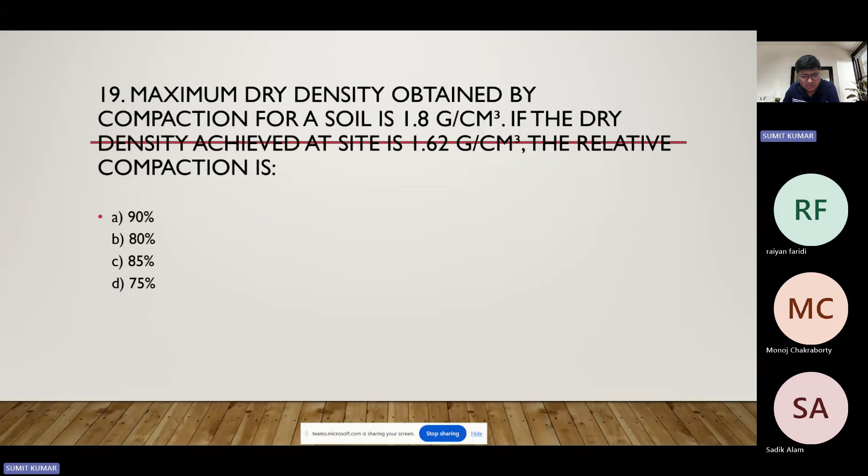The maximum dry density obtained - relative compaction is 1.62 upon 1.8. This value comes to option A, 90%.

Next: which factor is not directly related to soil compaction - soil moisture content, soil color, soil gradation, or compactive effort? Soil color is the correct answer.

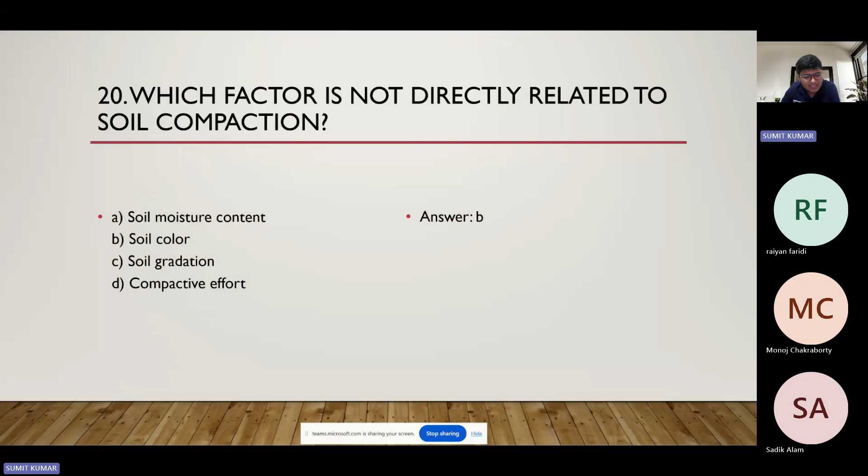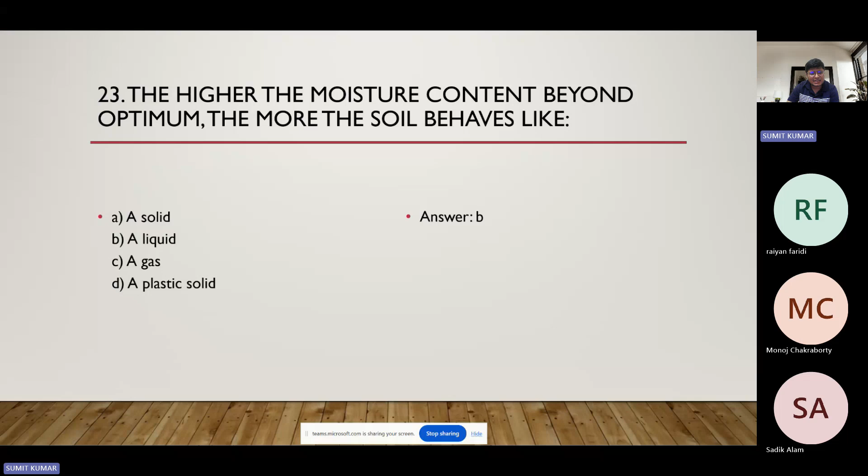Next: at higher moisture content beyond the optimum, the soil behaves more like a liquid. And the next question: if the soil compaction curve shifts to the right, it means the optimum moisture content increases.